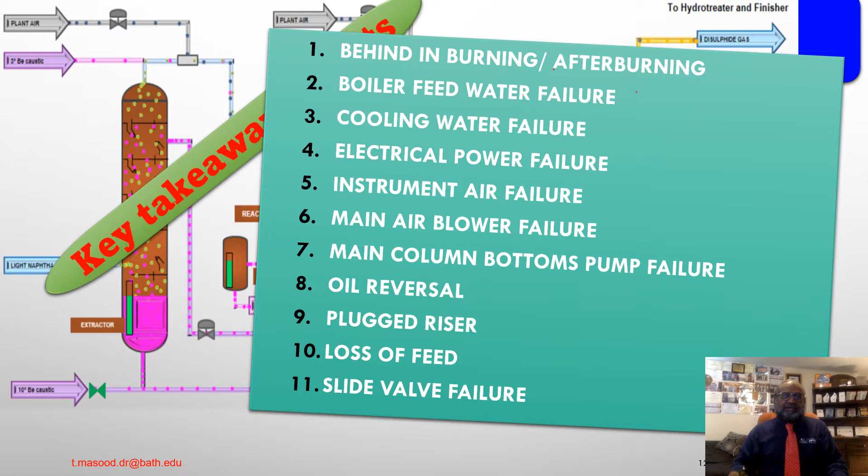Key takeaway points from lecture number 3 on emergency shutdown procedure. In my earlier lecture, we already discussed behind-in burning or after-burning, boiler feed water failure, cooling water failure, electrical power failure, instrument air failure, and main air blower failures. Today we are going to discuss main column bottom pump failures, oil reversal, plugged risers, loss of feed, slide valve failure, hydraulic oil supply failure, and controller malfunction. We are going to discuss two more.

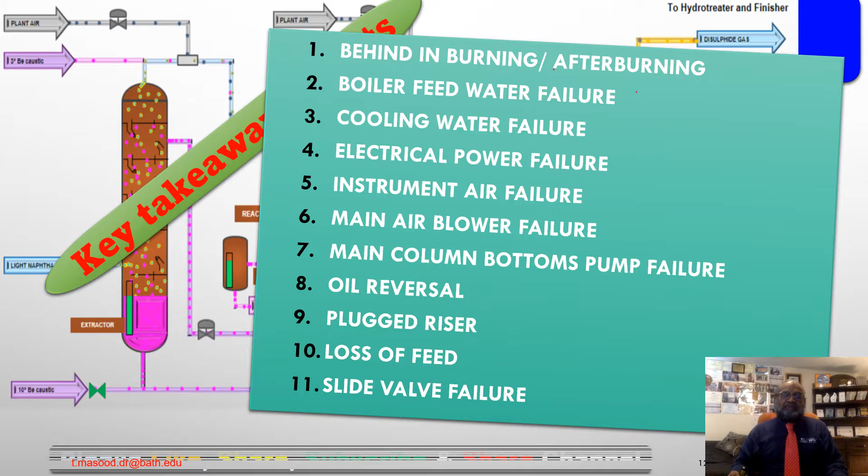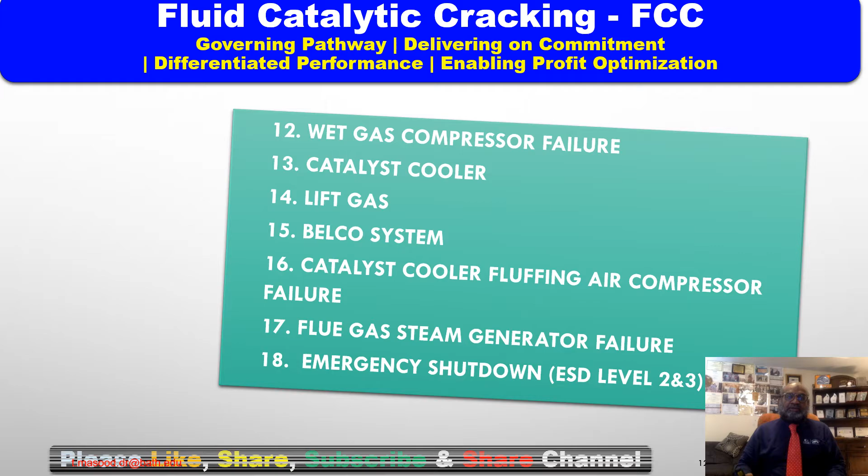Next slide, key takeaway points: spent catalyst slide valves, regenerated catalyst slide valves, recirculation catalyst slide valves, flue gas slide valves, wet gas compressor failure, catalyst cooler, loss of boiler feed water to cooler, catalyst cooler lift gas failure, Belco systems, high temperatures at sparer tower, FCC unit upsets, catalyst cooler fluffing air compressor failure.

Emergency shutdown procedure: the most important aspect of an emergency situation is to put the FCC unit into a safe position. This may involve stopping the raw oil feed to the reactor for a period of time to correct the problem. If this is necessary, the basic steps to keep in mind are:

Number 1, increase riser lift steam, feed steam, and stripping steam. Number 2, bypass raw oil feed to the main column and stop lift gas. Number 3, establish a negative reactor-regenerator pressure differential. Number 4, lower the reactor pressure.

These steps remove the hydrocarbon from the reactor, establish a steam barrier between the regenerator and fractionation section, and maintain good vapor velocity to assist catalyst circulation. When these conditions are established, the problem area can be investigated and corrected.

However, it is emphasized that every emergency situation must be handled individually depending upon the conditions existing when the emergency originated. The following recommended procedures provide a sequence of major steps which must be taken for the most likely emergency situations. Remember, bypassing raw oil feed and stopping lift gas is done by bringing the hand control valve into shutdown position.

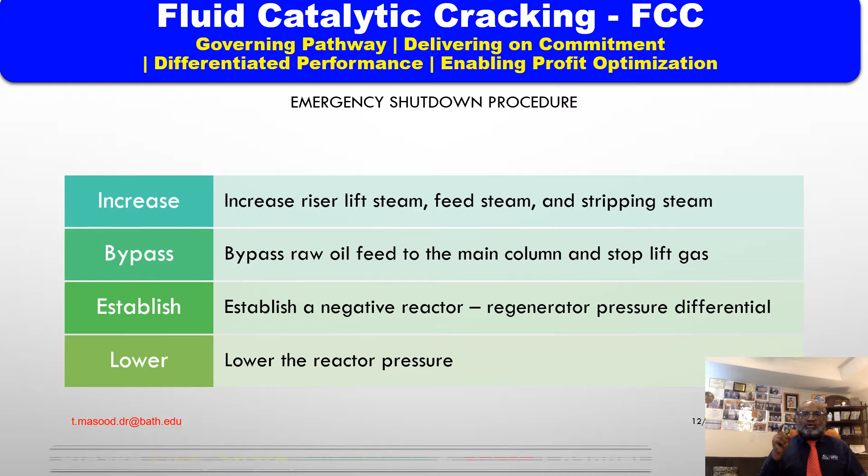Main column bottom pump failures. The main column bottom circulation circuits remove about 25% of the heat from the reactor vapors. If the flow is lost for more than 10 minutes, the unit must be shut down, since the bottom residence time and temperature would increase to the point where coke formation would begin. Also, the loss of bottom circulation could result in heat damage to the disc and donut tray and catalyst carryover up the column.

Number 1, the first priority when a bottom pump fails is to get the material out of the column and keep the bottom temperature down. Try to start the spare pump immediately. Reduce the charge rate up to 157 cubic meters per hour and lower the reactor temperature by 30 degrees Celsius. Decrease product draws slightly to aid in quenching the column bottoms. Number 2, if it is not possible to start the spare pump immediately, continue decreasing the charge rate.

Increase steam to the riser when the charge rate is below 60% of design to maintain catalyst circulation. Number three, if it is not possible to start the pump within 10 minutes, increase riser steam, increase feed steam, bypass the raw oil charge to the main column, and stop the raw oil feed.

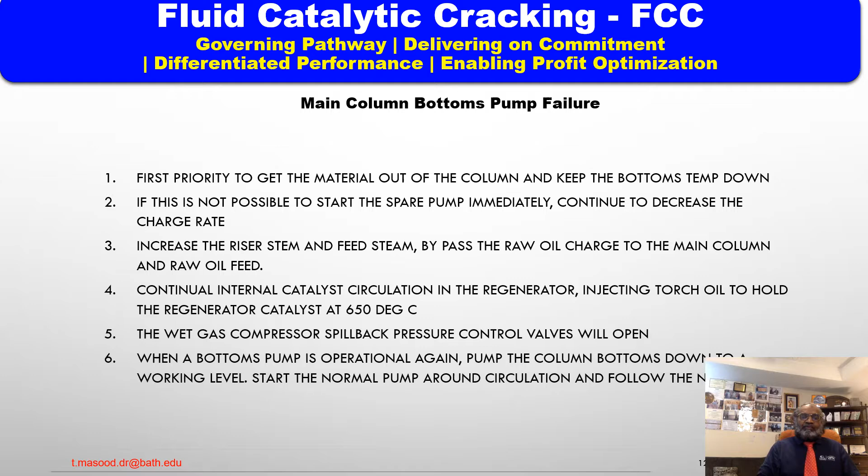Oil reversal: the raw oil charge is contacted by regenerated catalyst at the base of the riser. The oil vaporizes and the increase in pressure forces the mixture up the riser. If conditions arise where there is a sudden increase in reactor or main column pressure, or a decrease in regenerator pressure, the oil could be forced to backflow through the regenerated catalyst standpipe into the regenerator. This is known as reversal.

Once in the regenerator, the oil will burn, resulting in extremely high temperatures. A severe reversal may cause the temperature to exceed 1100 degrees Celsius, well over the design temperature of the regenerator internals.

If a reversal occurs, the following action should be taken immediately. Number 1, bypass the raw oil charge, increase steam to the riser, increase feed steam, and close the regenerated and spent catalyst slide valves. Lower the reactor pressure and maintain a negative reactor-regenerator pressure differential. Stop lift gas and block in the control valves.

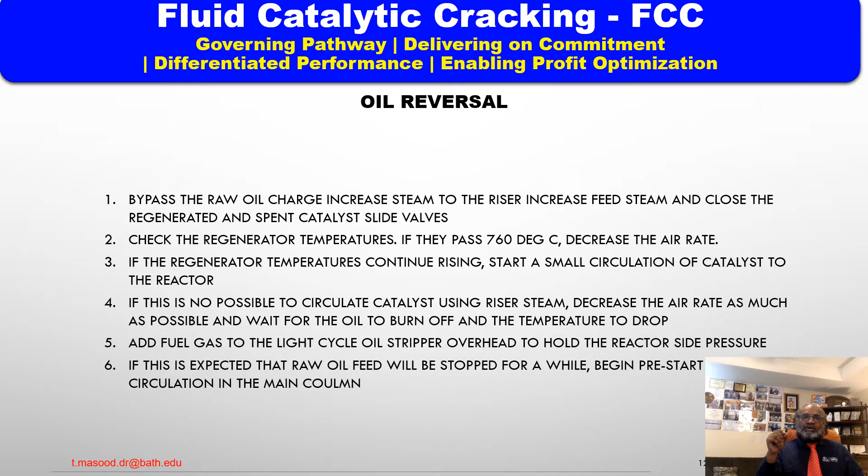Plugged riser: this condition can result from having insufficient steam in the riser while circulating catalyst, or too much catalyst relative to the oil vapors needed to lift it up the riser. In either case, the catalyst will slump and may plug the riser.

The slumping condition can be recognized by: number 1, the loss of differential pressure across the regenerated catalyst slide valves; number 2, a sudden drop in reactor temperature; number 3, a sudden drop in main column temperature.

The following actions should be taken immediately. Number 1, increase lift steam and feed steam to the riser. If this does not clear the riser right away, shut off the riser steam and bypass the raw oil charge to the main column. Close the regenerated and spent catalyst slide valves.

Maintain internal catalyst circulation in the regenerator and hold the catalyst temperature at 650 degrees Celsius using torch oil. Close the regenerated and spent catalyst slide valves and maintain internal catalyst circulation in the regenerator, holding the catalyst temperature at 650 degrees Celsius with torch oil.

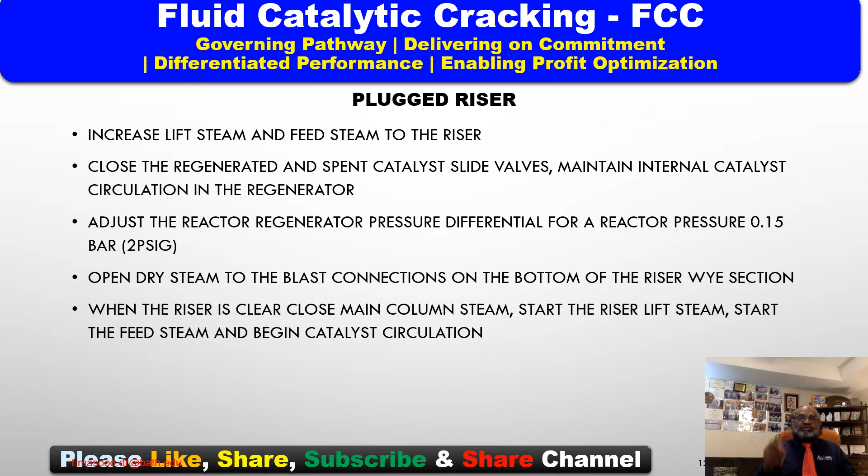If a loss of charge occurs, the unit must be shut down immediately. Immediately increase lift steam and feed steam to the riser.

Close the regenerated catalyst slide valve. After a few minutes, the riser should be free of catalyst and the spent catalyst slide valve should be fully closed. Establish a reactor pressure higher than the regenerator by adding fuel gas to the light cycle oil. stripper vapor return line as needed.

Block lift gas control valve. Shut down the wet gas compressor and lower the reactor pressure.

Start torch oil to the regenerator, holding the catalyst temperature at 650 degrees Celsius. Continue internal catalyst circulation in the regenerator through the recirculation catalyst slide valve. When raw oil is available, bring the unit back on stream following the normal startup procedure.

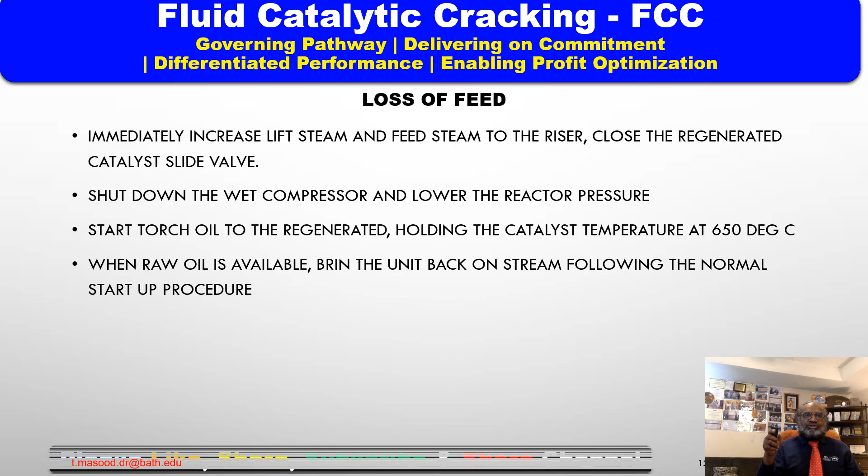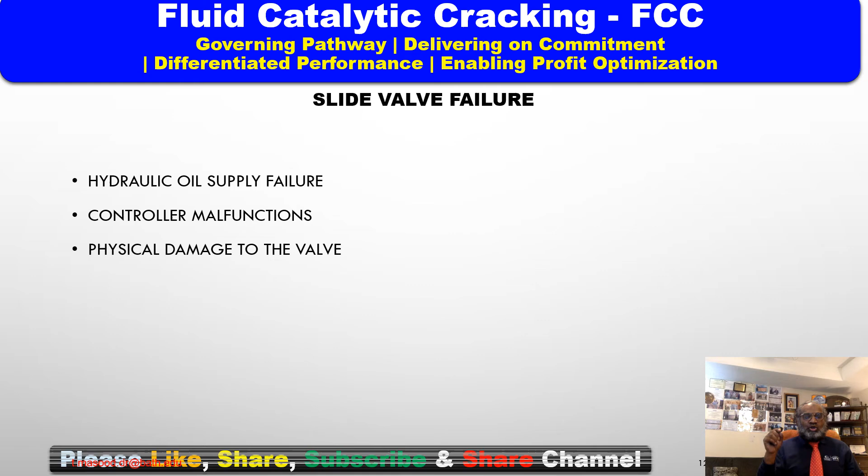Slide valve failure can result from hydraulic oil supply failure, controller malfunctions, or physical damage to the valve.

Hydraulic oil supply failure: a loss of hydraulic oil pressure could occur due to loss of the hydraulic oil pump or a ruptured hydraulic oil line. The loss of hydraulic oil pressure will result in the loss of control of the slide valve and will leave the valve in the position it occupied when the failure occurred.

Should hydraulic oil supply failure occur, the slide valve must be put on manual operation. If the unit operation is steady, a major upset need not result. However, the unit will drift off control and immediate action must be taken.

For cases when the hydraulic line remains intact, the slide valve main hydraulic oil accumulator will provide hydraulic fluid to the actuator to move the valves two full strokes. However, if the valve is not moved within approximately 4 minutes, the accumulator will have depressurized and will be unable to move the valves. When the individual main accumulator pressure is depleted, switch for spent catalyst slide valves,

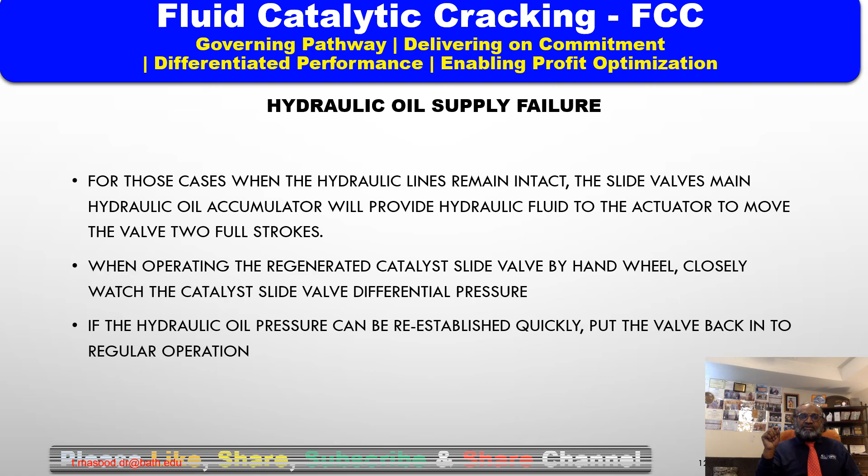Malfunctions: a slide valve will close upon the loss of its actuator electronic power or instrument signal. Since there is no alarm for these failures, they will only be apparent to the board operator when he sees that the slide valve is drifting to the closed position.

In this case, the slide valve must be operated using the hand pump, the hydraulic oil system local manual positioners, or the hand wheels. If the electronic input to the actuator circuit board can be re-established quickly, put the valve back into regular operation. For prolonged failure, the unit must be shut down.

When it is necessary to operate the regenerated catalyst slide valve locally, care must be taken to maintain a positive valve differential pressure so an oil reversal does not occur. If this does occur, refer to the oil reversal procedure for the emergency steps to be taken.

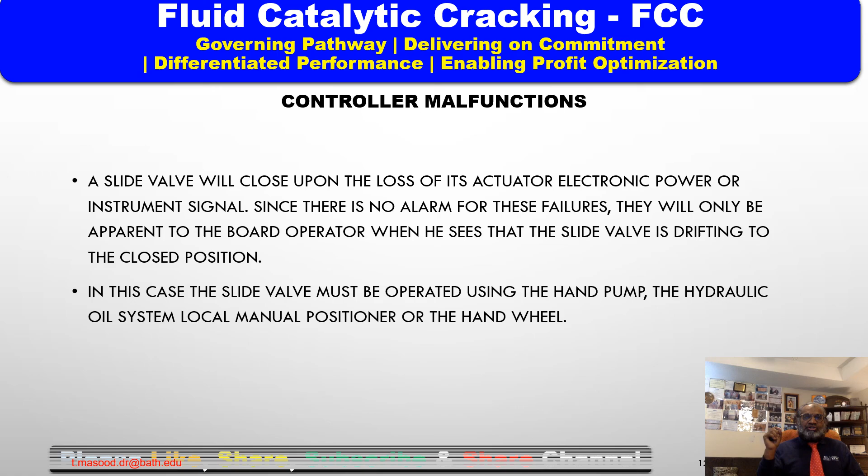Next, physical damage to the valve. The loss of slide valve control could be the result of excess disc erosion or a broken shaft. Corrective actions to be taken depend upon the valve affected.

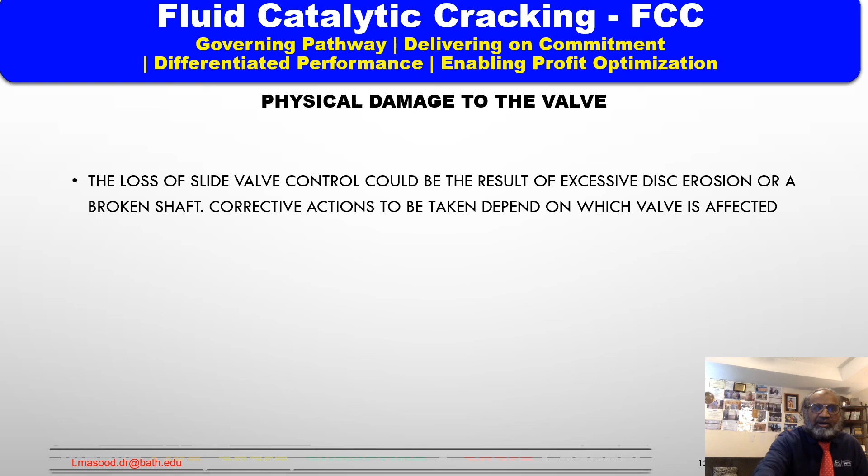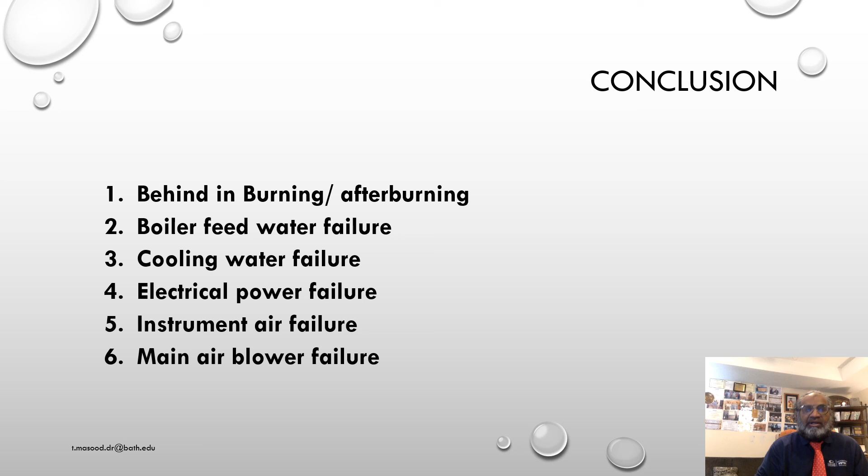Today we have discussed main column bottoms pump failure, oil reversal, plugged risers, loss of feed, slide valve failure, and hydraulic oil supply failure.